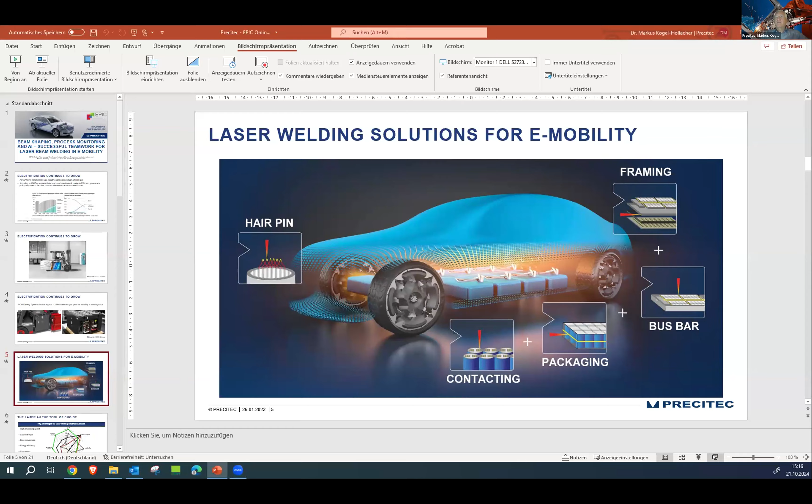Markus, sorry for interrupting - are you already sharing the presentation? Because we don't see the screen. You don't see the screen? No, I don't think so. Okay, one second. Now it's working, yes, sorry for that. No problem, so you're fine now? Okay, yep.

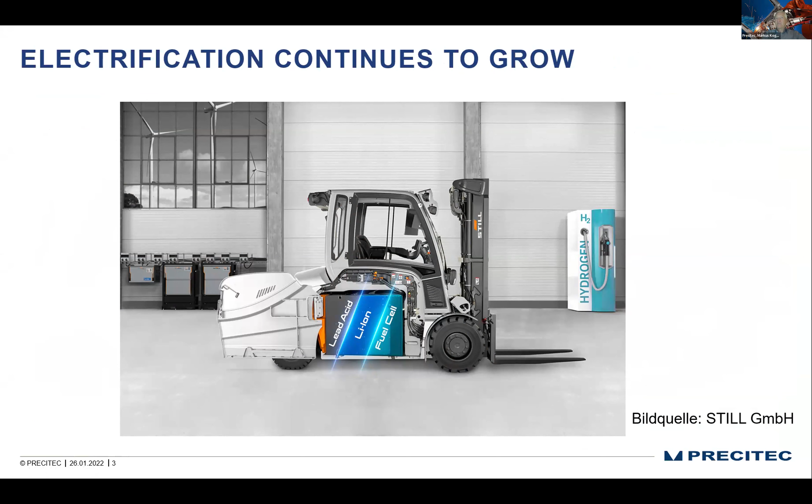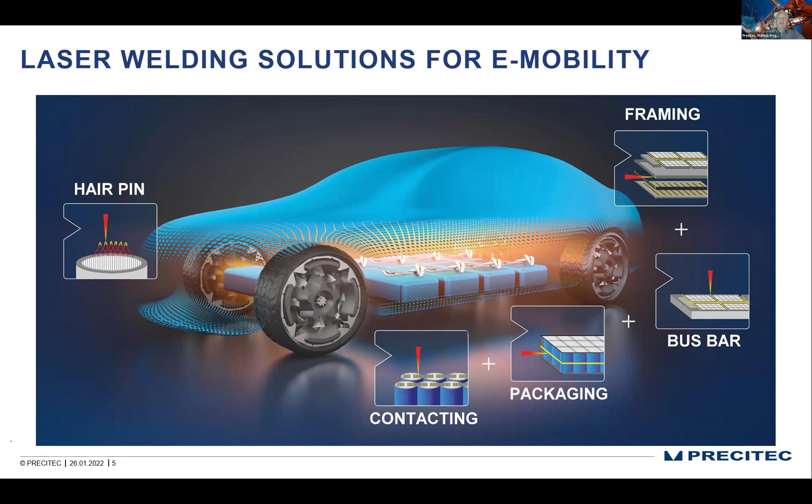So forklifters do have an impact on e-mobility, which is not the car. Whenever you are interested into that, just approach my son, who is working on that topic. Nevertheless, we have cars - we are working on stuff which is really, really expensive nowadays. If you think about the final module, whether it's the battery, the packaging, the hairpin and the resulting element, everything is much more expensive in the final product than it has been in the combustion engine times.

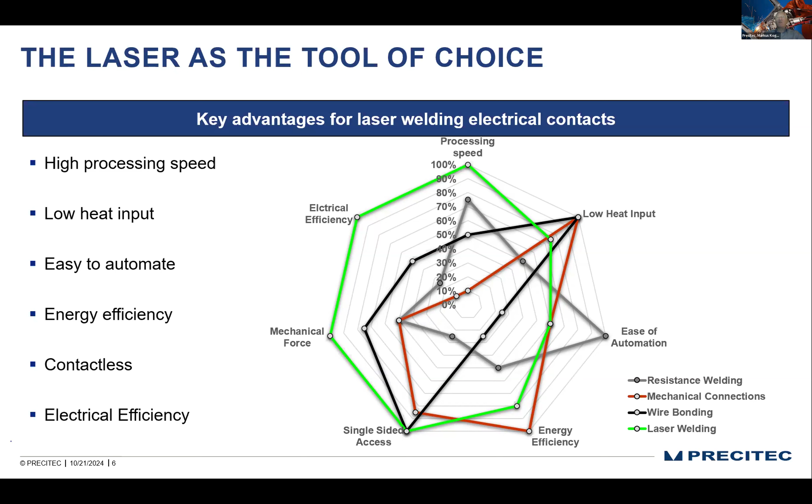The same is true if we talk about the materials - if we talk about copper, if we talk about steel. Steel and lasers is a winning team, definitely. I'm pretty sure Andreas Heider will talk about that in his presentation.

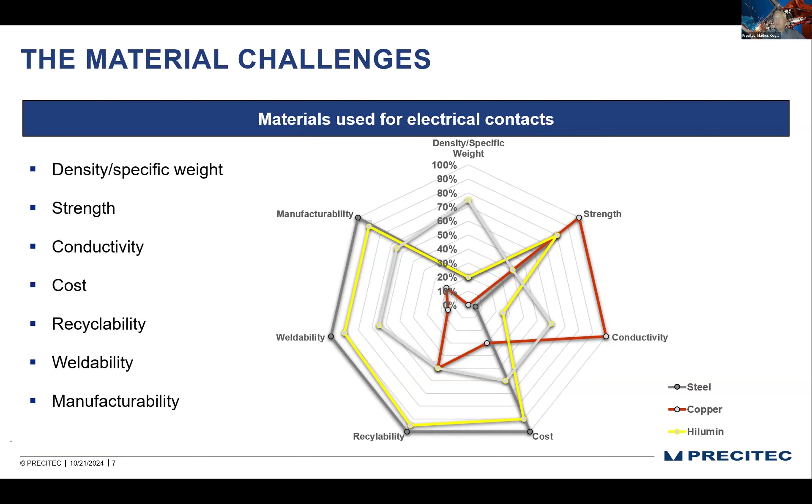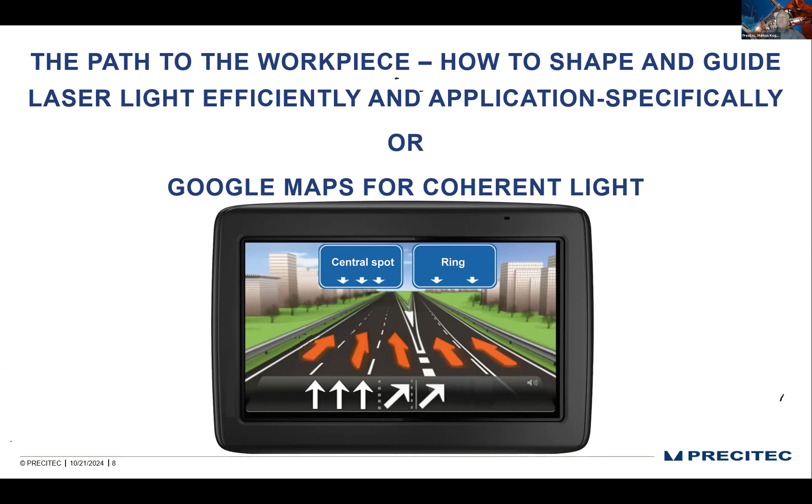Nevertheless, we need to take care about something which we haven't taken care about 10 years ago, and this is the point where we apply the photons. We have the freedom these days to bring the photons to the right point for the specific application, for the specific material. So it's not necessarily just top hat or Gaussian beam, which it has been 10, 15 years before. We now have the freedom to work on that.

And the freedom to work on that is to use beam shaping. There are a lot of choices on the market with respect to beam shaping, in quotation marks, based on optical elements, but also combiner technology, fiber manipulation technology, and coherent beam combining, which is the most impressive stuff and for sure the most expensive these days, we have to admit. Nevertheless, beam shaping is crucial, and it really helps in many applications, also in the applications we are addressing in e-mobility, to increase the quality of the final weld of the final product.

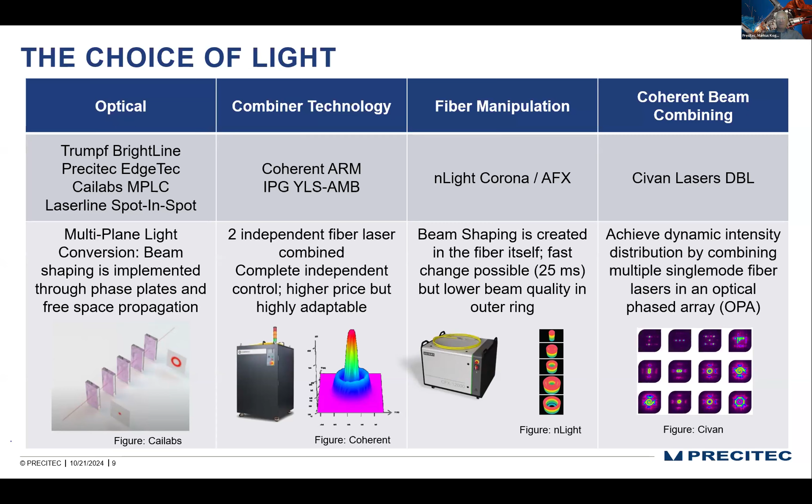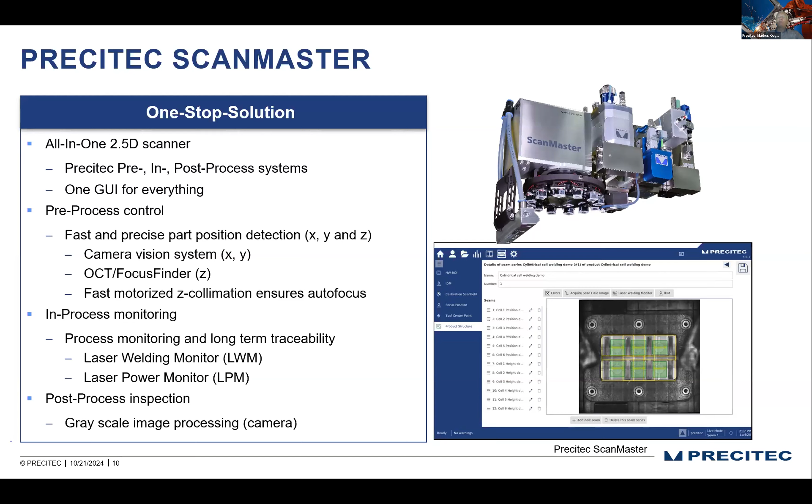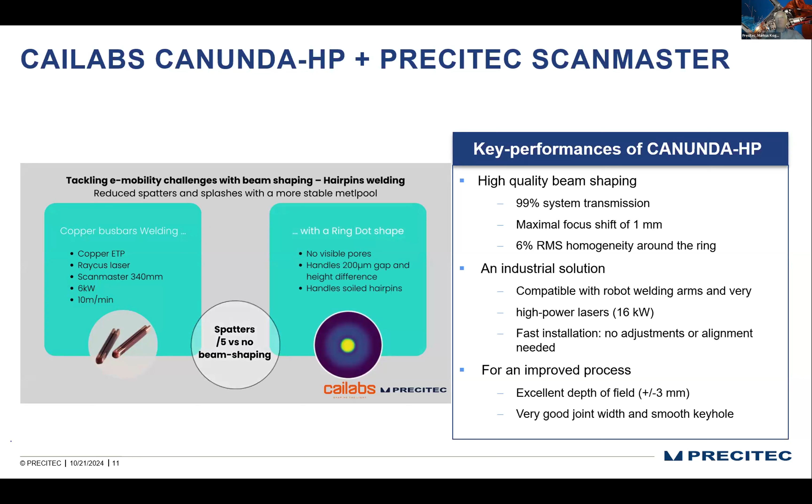We have done so with our ScanMaster, which is a combination of many Precitec knowledge areas, from cutting to sensor technology to welding, all part of that ScanMaster. But the ScanMaster also includes beam shaping technology, and we have partnered with Cailabs on that, because we have seen that technology is for us the most promising one - it can be easily integrated into our beam path, and it can easily change from the old-fashioned Gaussian or top hat beam profile to a better profile for the specific application. For us it's just an add-on module in between the collimator and the processing head, in order to change the intensity distribution, increase speed, and reduce the spatter formation.

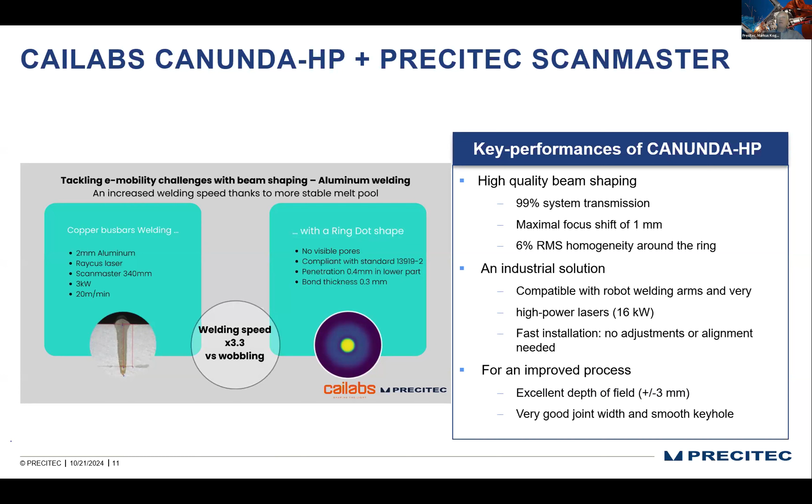So there's many, many benefits for us to include those elements, to include beam shaping in our beam path. For sure, and this is what Antonio already said, we are also taking care about the quality by means of sensor technology. There has always been, and there will always be, Precitec products with sensors. No Precitec processing head will leave the company without at least one sensor. And in welding, it's most probably photodiode sensors these days.

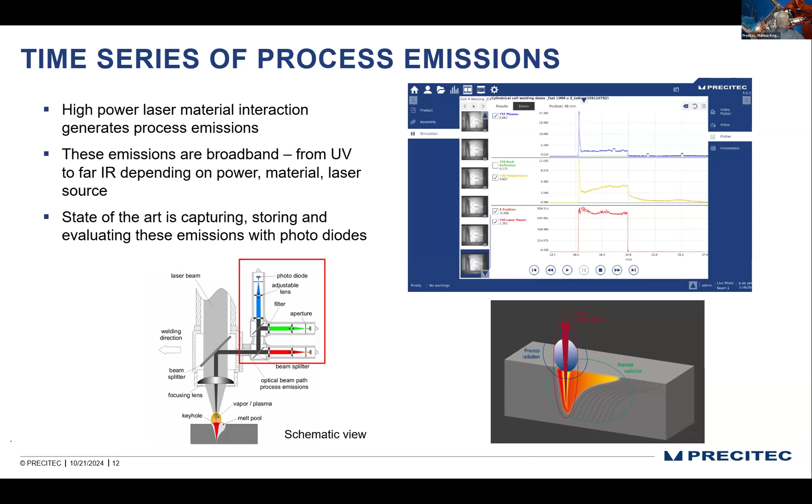The old-fashioned way of applying photodiode sensors was to get the fingerprint of a process, to calculate envelopes for the upper and lower interaction limits, and to say the process is good or bad. So we have taken the chance with customers, to name one of the customers, Audi, to go one step further. We have now worked on the possibility to derive specific physical information out of that process light.

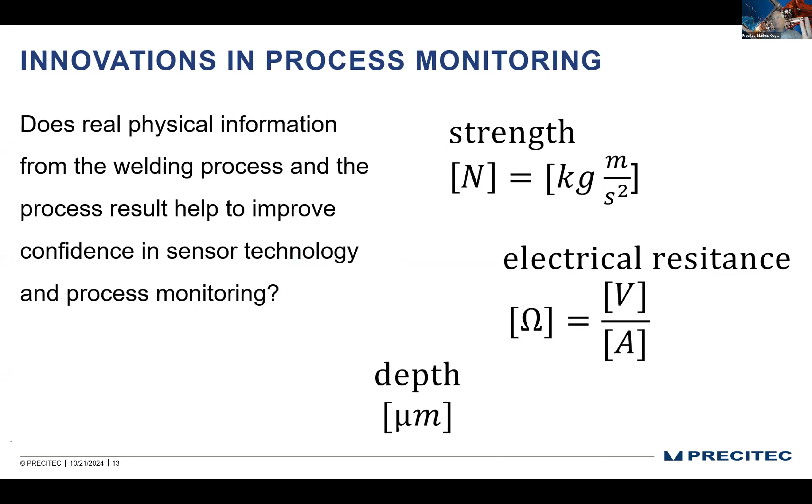Customers like Audi, like others, approached us and they said, we need more information. Just red, green is not enough. We need information about, for example, the strength of the weld or the electrical resistance or the depth. Okay, depth we had in our pockets already by applying OCT. OCT is one of those sensor technologies which was more or less pioneered by Precitec in order to measure weld depths during processing. But this is just one of the physical information customers were talking about.

If we talk about other physical information, like strength or the electrical resistance, we need to go one step further. And this is AI. We need to apply AI. We have increased our AI knowledge at Precitec by setting up a department at the University of Karlsruhe, which is the Precitec incubator. These are data scientists. They only know data science. They only know data processing. And they worked on applying specific deep learning algorithms on our time series data.

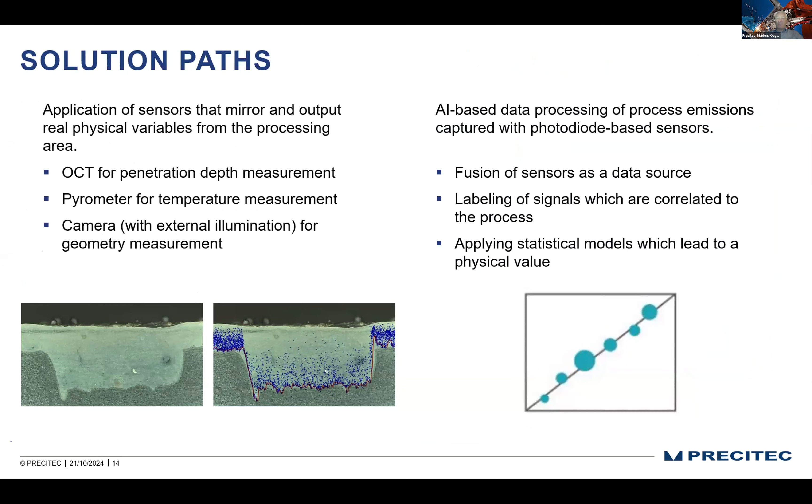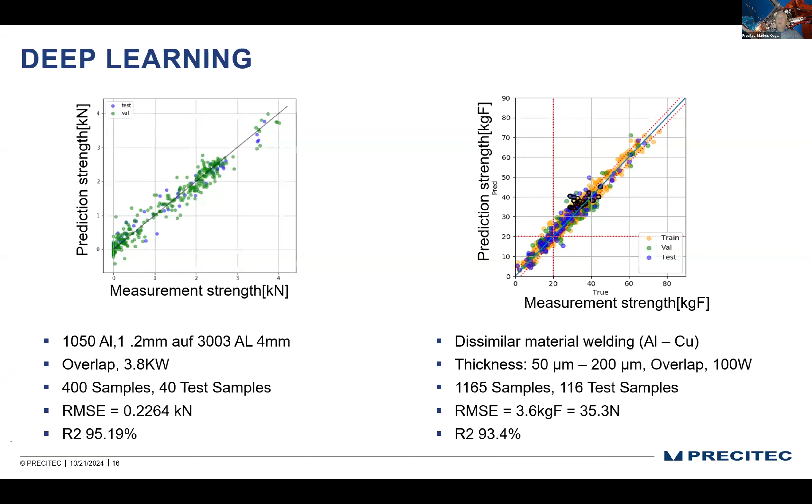We applied an approach based on long short-term memory, LSTM, which is one of the possibilities out of many, many in the deep learning portfolio. LSTM is maybe known to some who are listening as the deep learning algorithm behind Siri or behind Alexa. It's one of the specific ways of working with time series data. And our photodiode signals, those are time series data. It's a lot of data, I have to admit, and it's a high frequency of data, but the LSTM is one of the most promising.

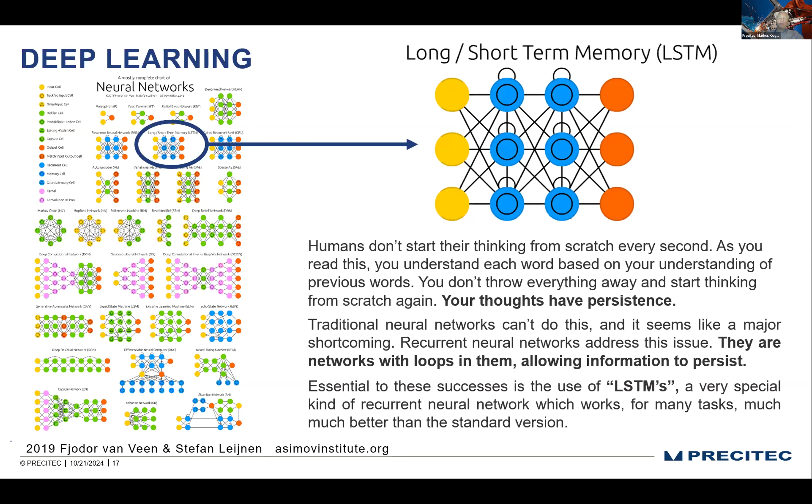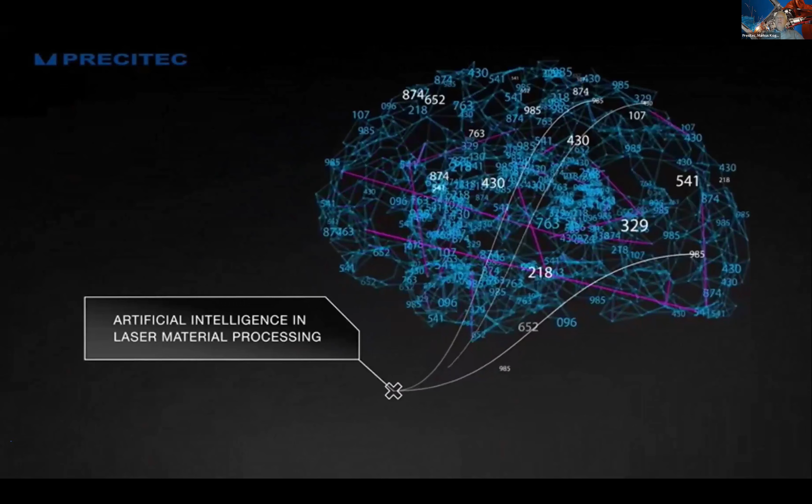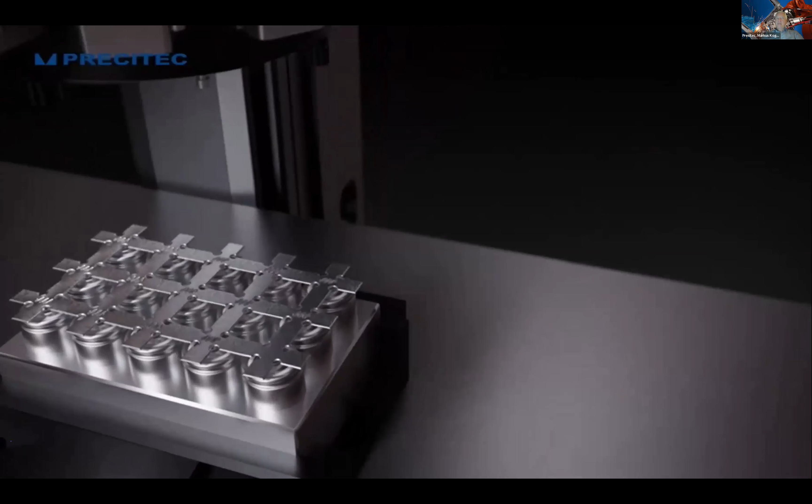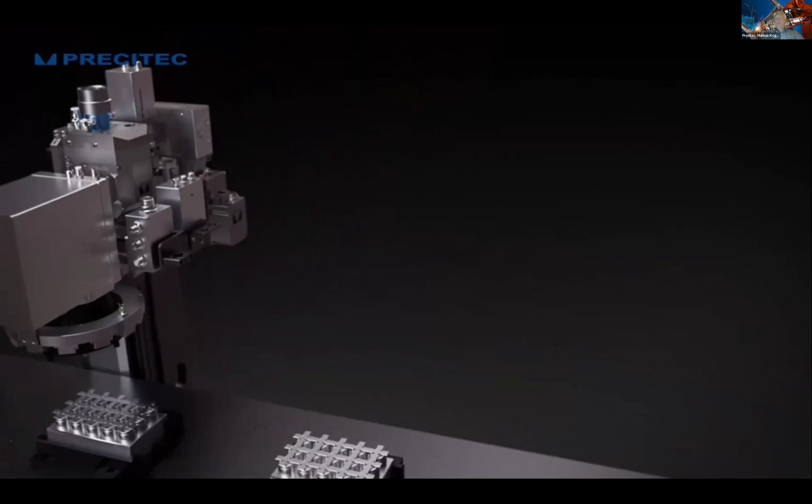In the end, our approach is to be able to work with AI algorithms on laser welding applications. So this is one of the applications we're working on now. It's different to the 2 which I showed you before. This here is the battery contacting, and the physical value here which is important is the electrical resistance. Just for exemplary purposes, we have shown here a zigzag welding. Customers use different strategies for welding these contacts.

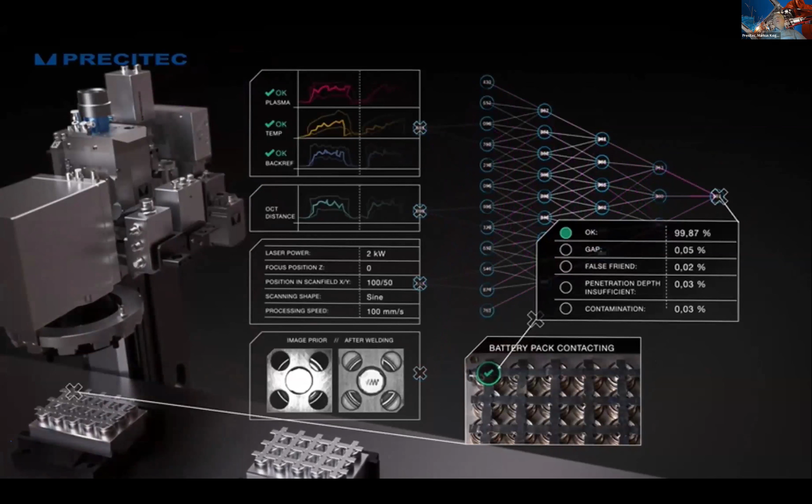Nevertheless, the idea is we get the time series data, we apply AI, and in the end, we derive the electrical resistance directly in microohms out of the emission data coming from the process. You see that we can calculate good or bad resistance, and together with the customer, we have taken the chance to apply a repair weld next to the original weld, with the hope that we can then bring the electrical resistance to the desired value. We have one customer who is doing that right now. It's just starting.

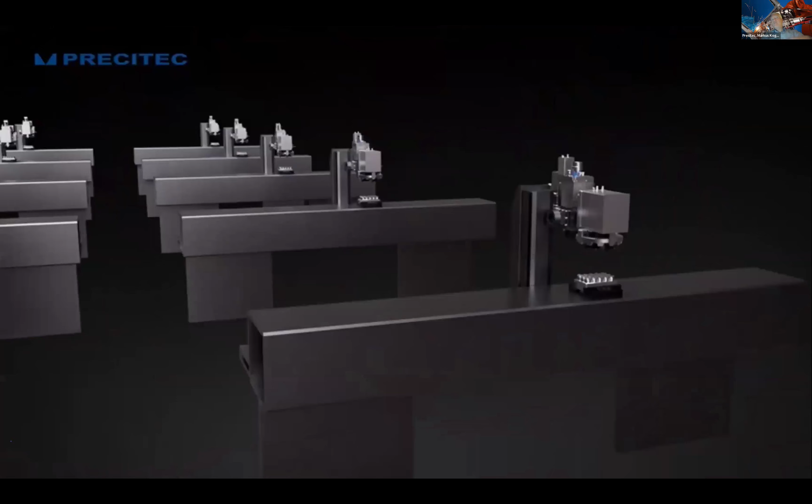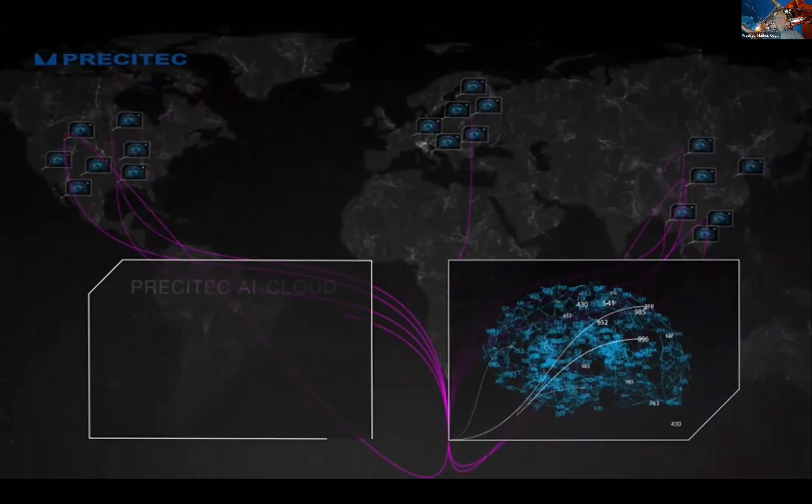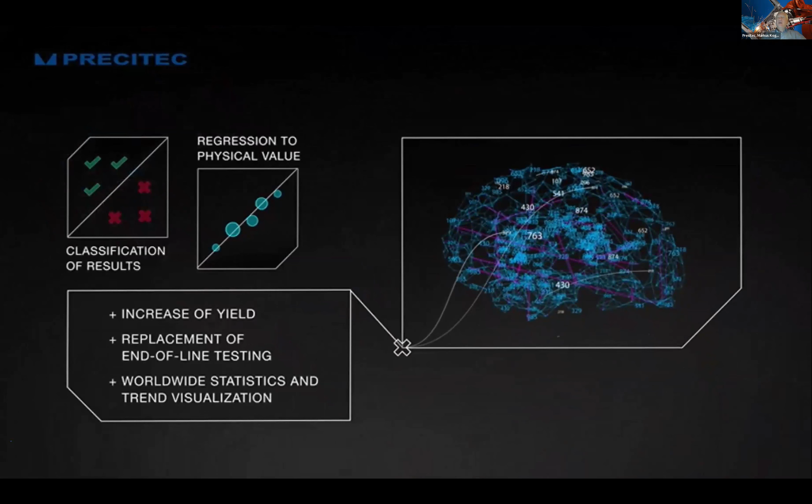So for us, it's also new technology, new experiences, but we are hoping that we convince more than that one customer on the profitability of applying AI in those applications. And maybe we can generate some kind of cloud, customer cloud, Precitec cloud, whatever the name is, so that we can connect information over the globe. We are a small company, but nevertheless, we are globally active. And maybe we can use that chance to increase the knowledge and to train our AI models across the globe.

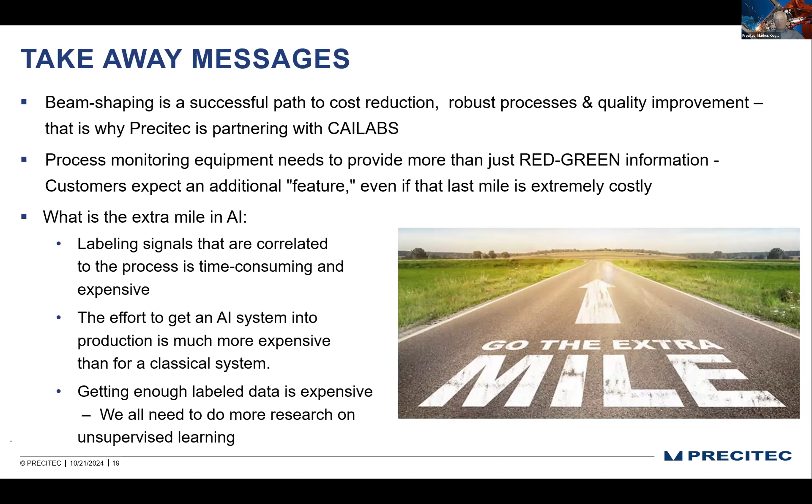So these are the messages I hope you take home. It's an extra mile, and we go the extra mile. The extra mile is definitely with respect to AI. We can check mark that we have successfully started beam shaping inclusion in our processing devices. We can check mark that we apply AI. Nevertheless, every AI application right now is a whole lot of work, because getting the training data is really expensive and time consuming. If we are able to convince more customers, maybe we have the chance to continue working on that and make people happy.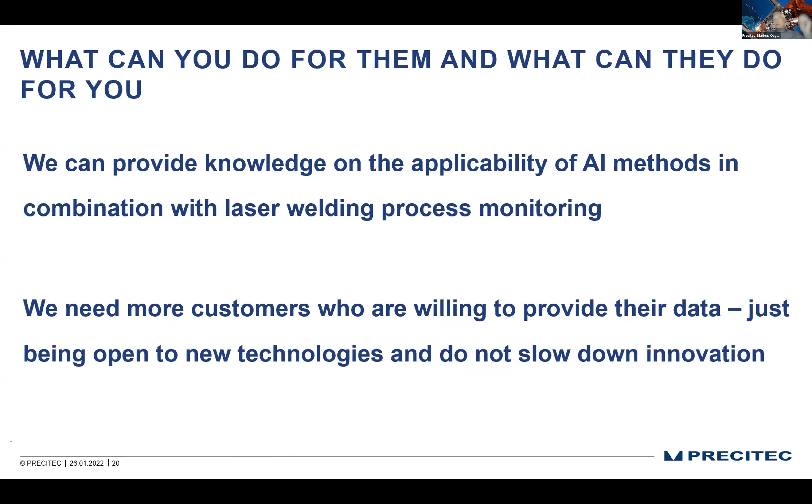The typical question in the end: what can you do for them and what can they do for you? We can provide knowledge on the applicability of AI methods in combination with laser processes. And we need customers who are willing to provide their data in order to make our work easier, to speed up AI applicability in lasers. Customers just need to be open to the new technologies, and if they are open, we increase the speed of that innovation. Thank you so much for your attention.